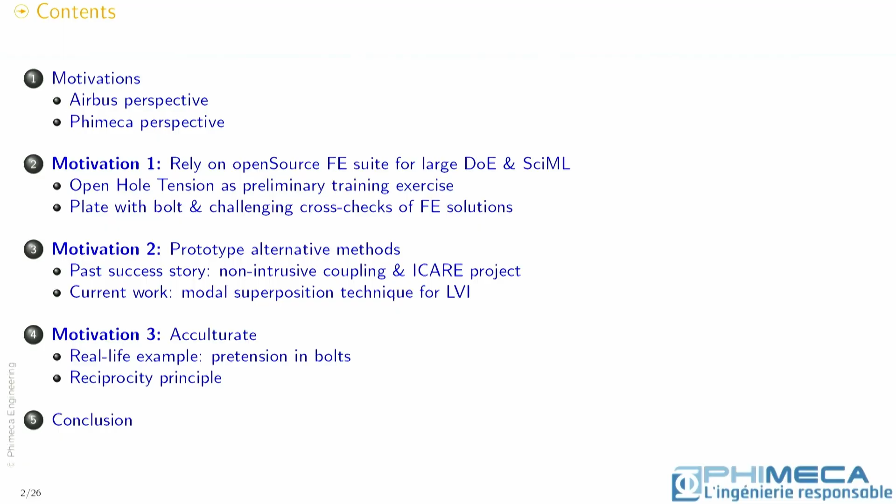Karina will concentrate on 2 use cases we defined to anticipate this change from commercial software to Code_Aster. The second motivation is about a huge opportunity to prototype alternative methods, to test something else than we do usually on commercial software. I'll evoke 2 use cases, 2 different examples: one extracted from the past, a project called ICARE, where we joined together with EDF, and one other out of my current work, preparing additional use cases. But first, I'll let Karina develop further the 2 first sets of use cases we are addressing today.

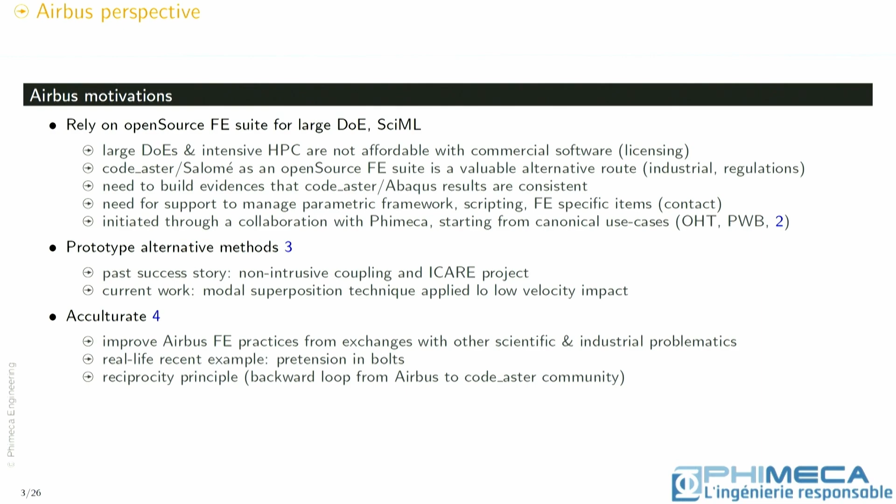You have told about this kind of motivation. So for Phimeca, there are several motivations. The first one is about exploring new methods in machine learning applied to structural calculation using finite element. Those kinds of methods use mesh morphing methods. And we are also interested in using Code_Aster for innovative solutions.

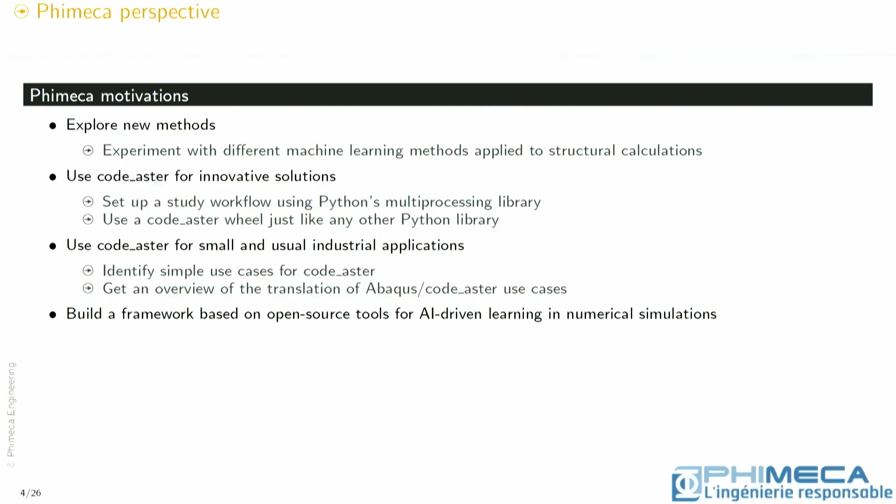So we have set up a study workflow in Python, only in Python, using the multiprocessing library. And we also built a wheel that will help us stay in a Python environment. We are also interested in how industrial customers could use Code_Aster, how Code_Aster provides solutions in their applications.

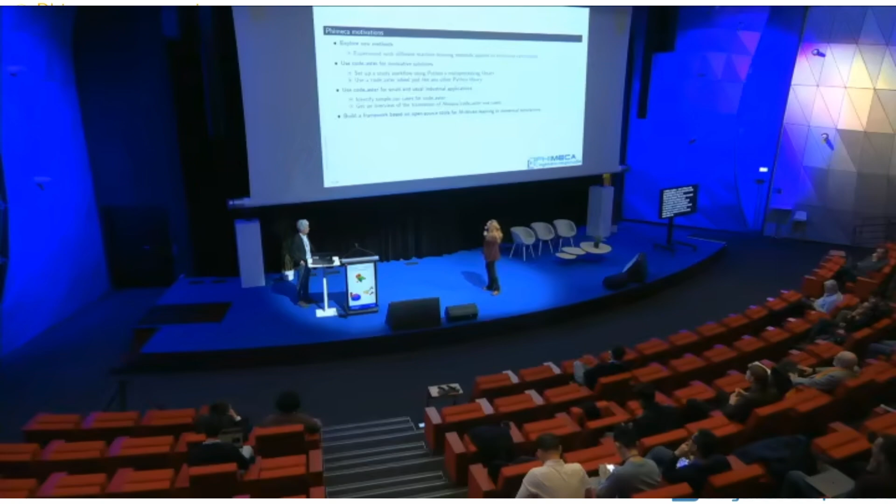So with Airbus, we identified some simple cases, and here we present only 2 cases, but further we will have other cases to be treated. In the second case, we see how we can compare Abaqus and Code_Aster, and what kind of translation could be done between them. We are also interested in building a framework with open source tools for AI-driven learning in numerical simulation.

We start with the first example. It's a very simple case, because everyone has tested this kind of structure. It's a plate with a hole, and only a quarter is modelized. We consider the 4 parameters that characterize the plate, which are the height H, the width L, the radius of the hole in the plate A, and the thickness of the plate T.

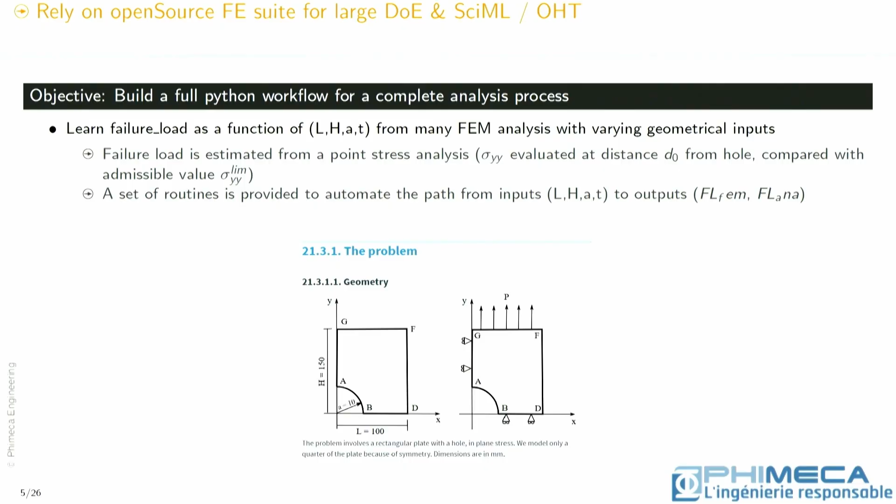So we look at the failure load estimated at distance D0 from B. There is an analytical solution also. This was a case to build a workflow fully in a Python environment. As usual, there is the geometry, the mesh, and the calculation with Code_Aster. And for the first time, we treat the field results from the calculation with machine learning methods, which are the stress field and the displacement field. So that was the case, very simple, and it works, and the results are satisfactory.

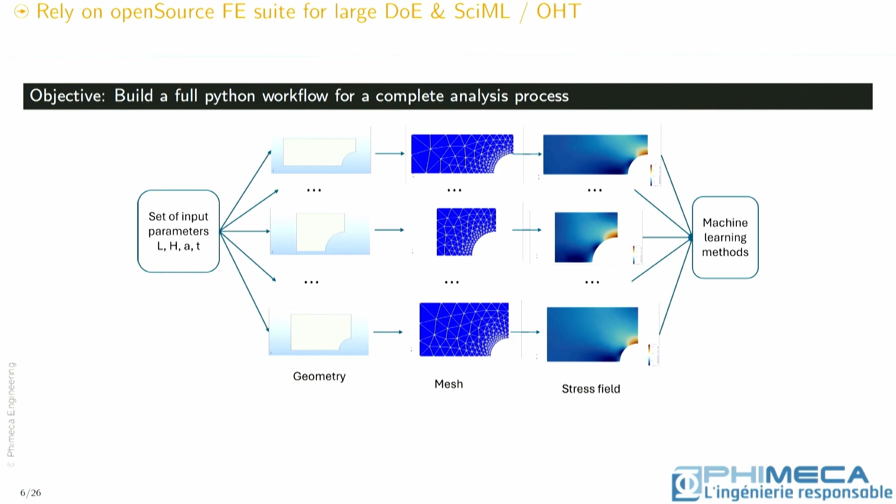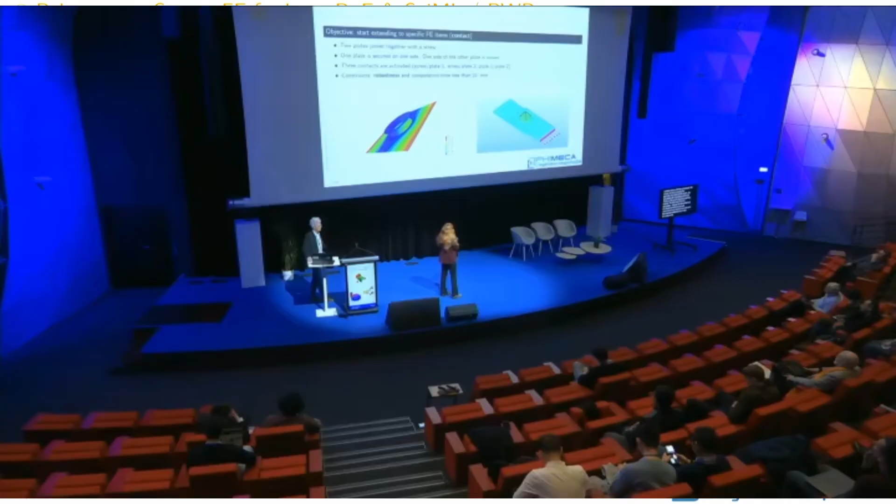So we go for a case that is more complex, which is two plates joined by a screw. One of the plates is clamped, and the other is pulled, and there is also a beam to stabilize the calculation. There is contact, three types of contact with thickness between them. There is good result interpretation, but we have constraints: we have to change geometry, change the mesh, change the different parameters of the modelization, and this calculation must be robust even if you change everything. So we did not succeed in getting a very good result with this kind of simulation, even if the interpretation was good. There is a lot of convergence problems in our cases.

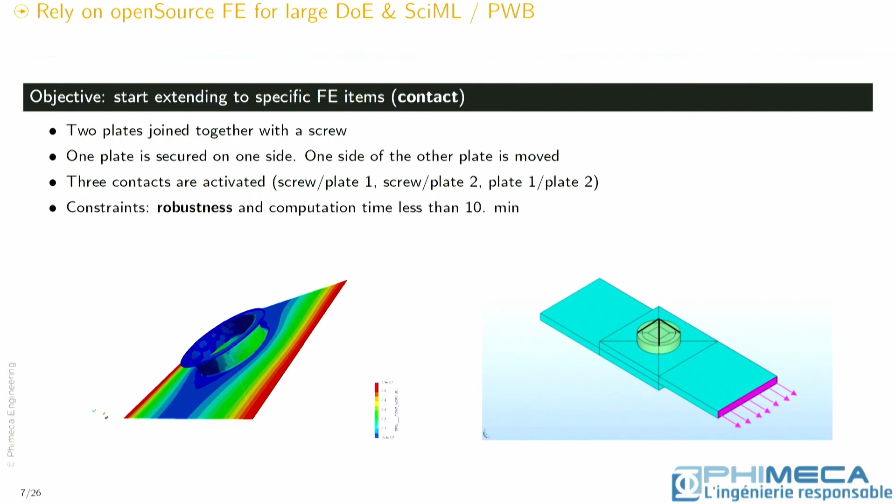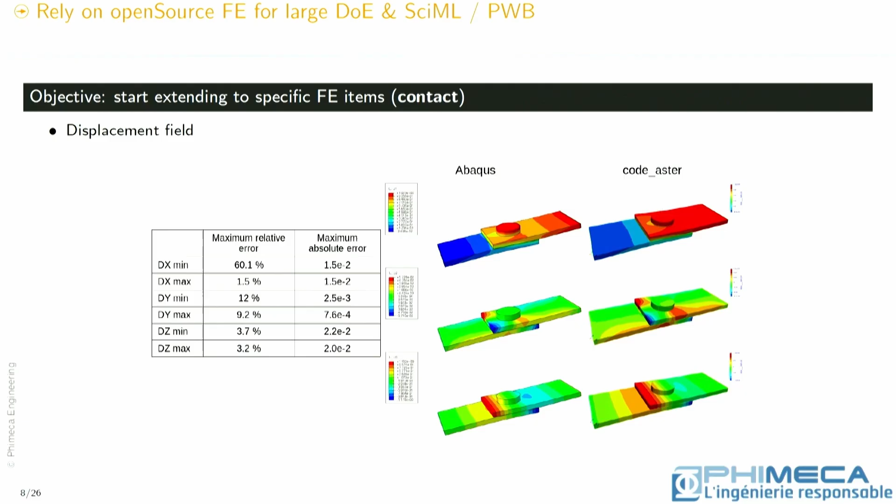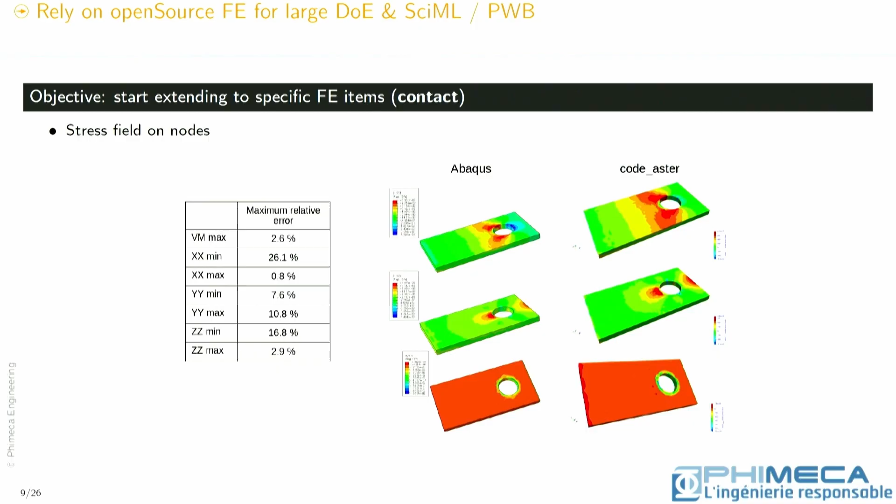So I could show you some results where we compare Abaqus with Code_Aster, but we have changed a lot of parameters, and this is not possible when we want to perform a large number of simulations, changing a lot of things. So the results are not very satisfactory. We have looked at the displacement and the stress field on different pieces, but the result is not good enough to go further.

The next set of motivation is about prototyping alternative methods. Here I will cite an example taken from the past, the project ICARE, 2013-2017, which emerged from preliminary work led at LMT by Allix and Gendre. The idea was to couple non-intrusively, meaning with no refurbishment of the global mesh, a global representation of the whole structure and a local representation of the local detail to be investigated.

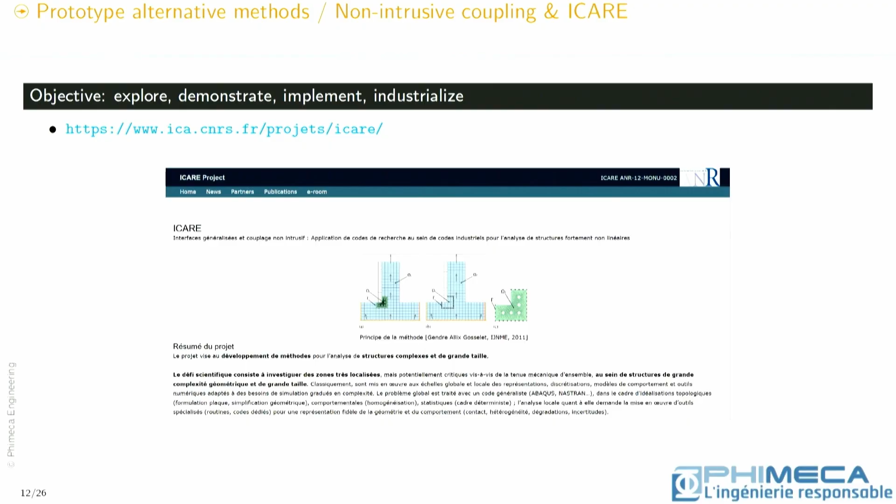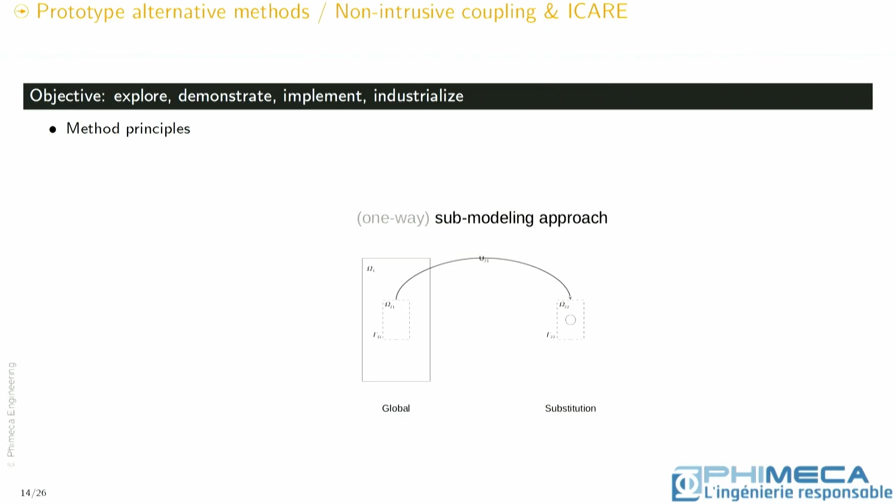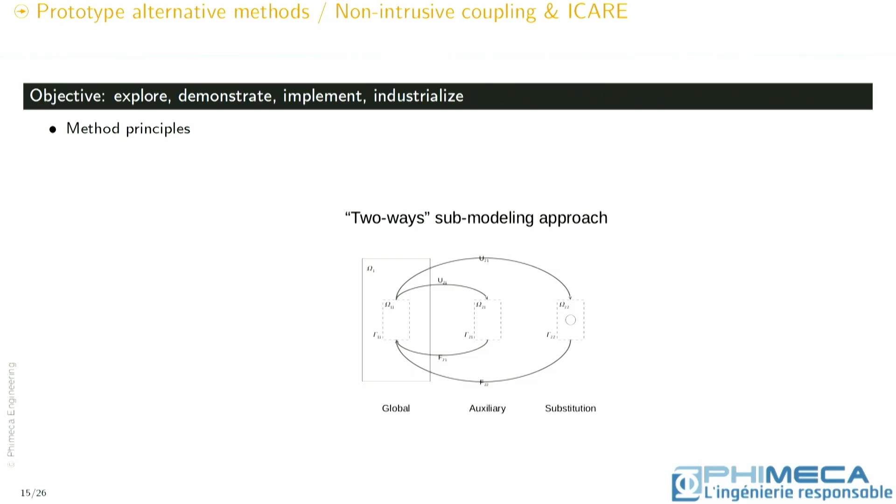To do that, we explored an alternative to the traditional sub-modeling approach with just displacement extracted from the global and injected into the local. We implemented a two-way sub-modeling technique, which is iterative and which re-injects from the local to the global the reaction forces extracted at the border of the local model. So this was the primary idea. And the interesting fact is that the initial work started with Abaqus, but highlighted that this was not a convenient environment to go further.

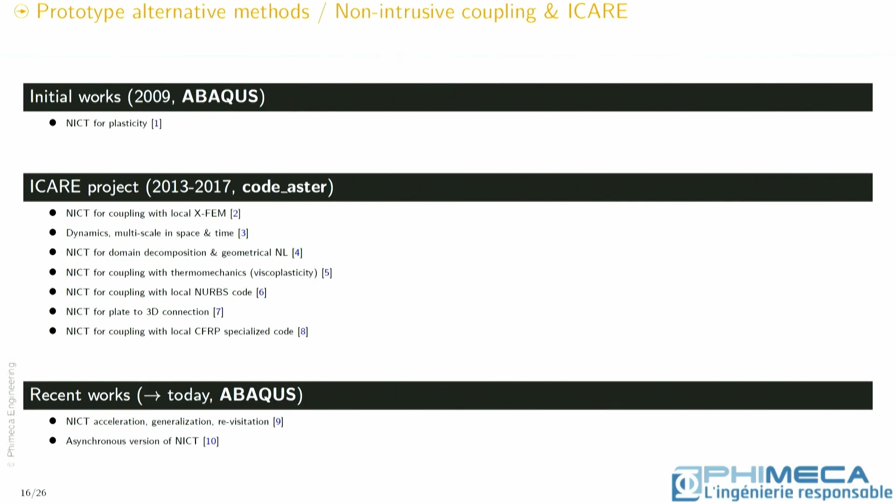Then, within the ICARE project, we shifted to Code_Aster to get this freedom of development. We explored many different topics: coupling a local X-FEM code with a standard global code, coupling dynamics with a standard static code, coupling for domain decomposition needs, and so on. We developed a lot within Code_Aster, and by the end of ICARE, we were in a position to propose a first, very preliminary prototype to the Simulia guys, the Abaqus development team. Years after, through the co-simulation engine around Abaqus, we have the possibility to really make those initial ideas alive in an industrial environment. It dates from 2013 to 2017.

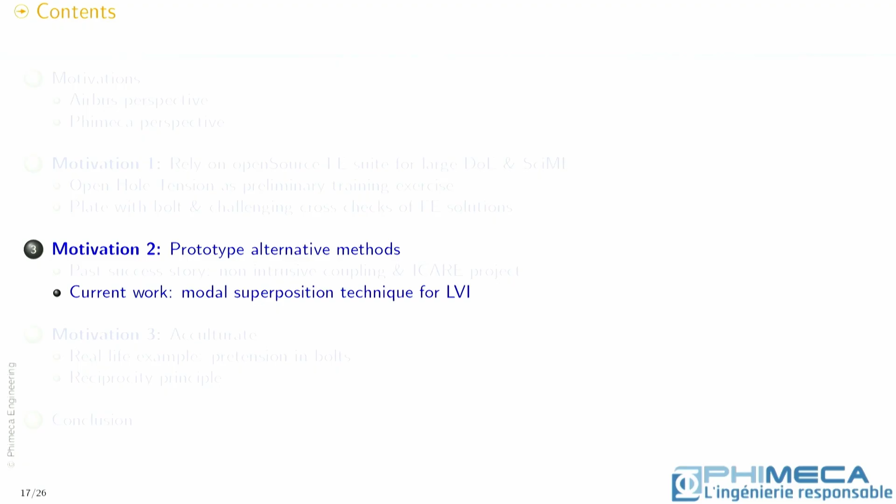The other example is extracted from a much more recent activity, preparing the next use case to be shared with Karina. It's about low velocity impacts, another critical use case for our applications: damage tolerance against shock, low velocity shocks of fuselage panels. It looks like an aeronautical structure.

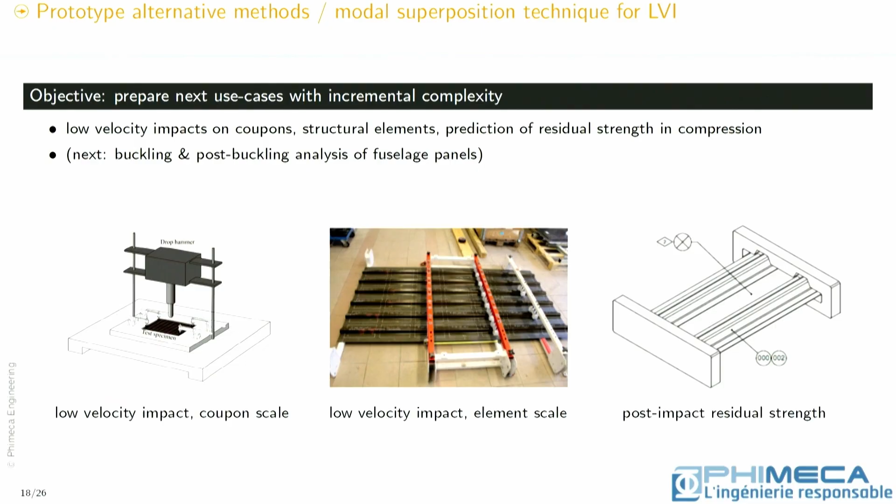Here it's low velocity impact, meaning it's not rapid dynamics, but it is dynamics. So when trying to apply, usually we use explicit computation to deal with it, which is too expensive within the framework we want to develop. So we turn to alternative methods like modal superposition.

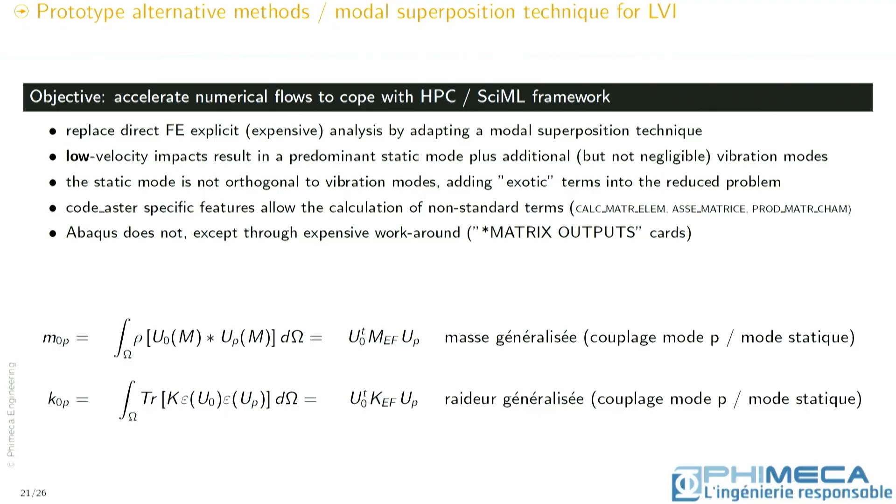And those terms, you can't compute with a commercial software. Here you need to rely on available features within Code_Aster, which are mentioned here, and which allow you to compute those terms and, in the end, to solve the problem. There would be ways through Abaqus, but a very expensive workaround—you'd have to write the complete assembled matrices to the file system, reread them, and reinject them in the solving.

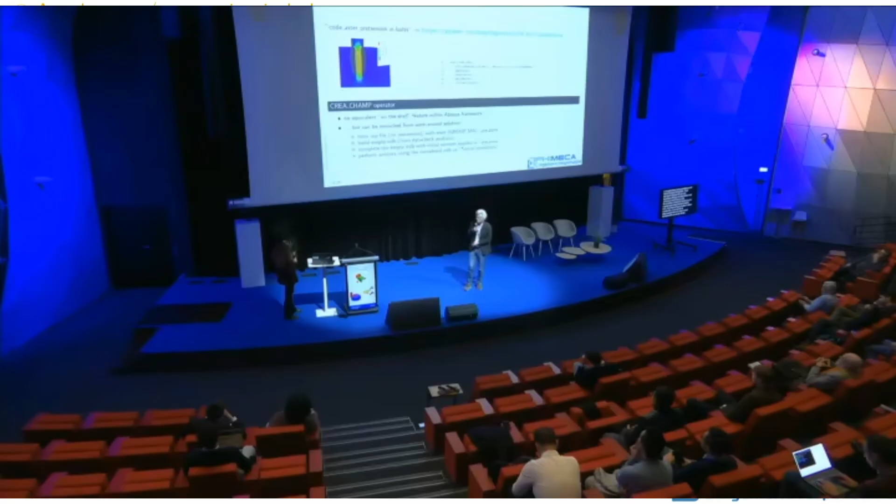The third and last motivation is about acculturation. It sounds a buzzword, but it's for real. I took a small example which is real life. During my activity with Phimeca, we had to decide something about the way to introduce the pretension in the bolt, which is critical to capture the true behavior of the bolt.

Knowing nothing from scratch with Code_Aster and pretension, I went on my preferred web explorer. I typed Code_Aster plus bolt plus pretension, and I got this GitHub emanating from an Italian company, reminding the different ways to model pretension, which are about using expansion coefficients in a thermal approach, or cutting the bolt into two different parts and applying a pretension.

And there was a much more seducing method relying on CREA_CHAMP in Code_Aster, just introducing the initial stress as initial conditions, which was not standard in Abaqus. So we had to develop something specific to mimic the same in Abaqus, but in the end we could manage.

So yes, this is really for me acculturation, and the benefit we have when turning to Code_Aster and the associated community is to discuss with guys who deal with completely different environments, industries, interests. It's really important.

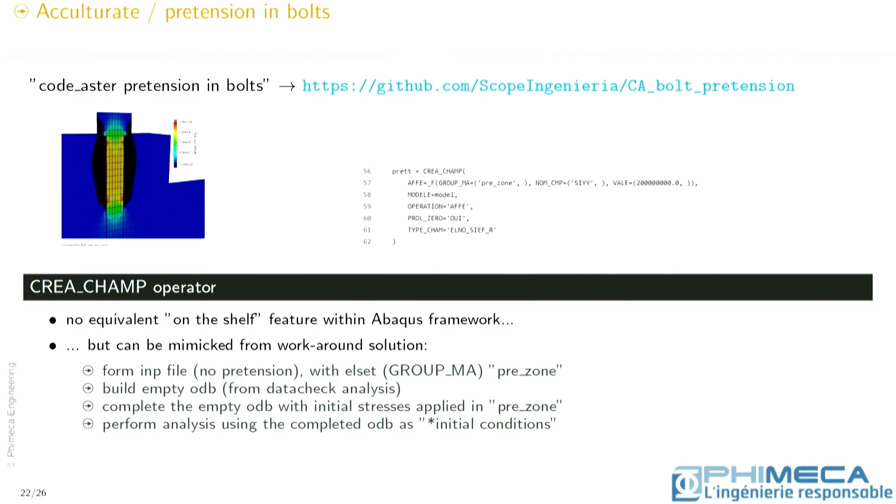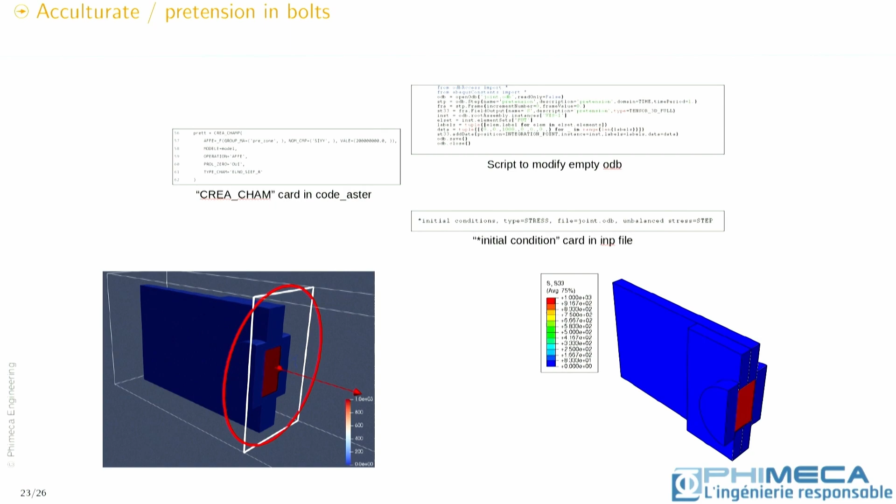The expected result of the pretension introduction, and the different ways through CREA_CHAMP in Code_Aster and through an ad hoc method in Abaqus. Behind the fact we rely on open source, there is a reciprocity duty.

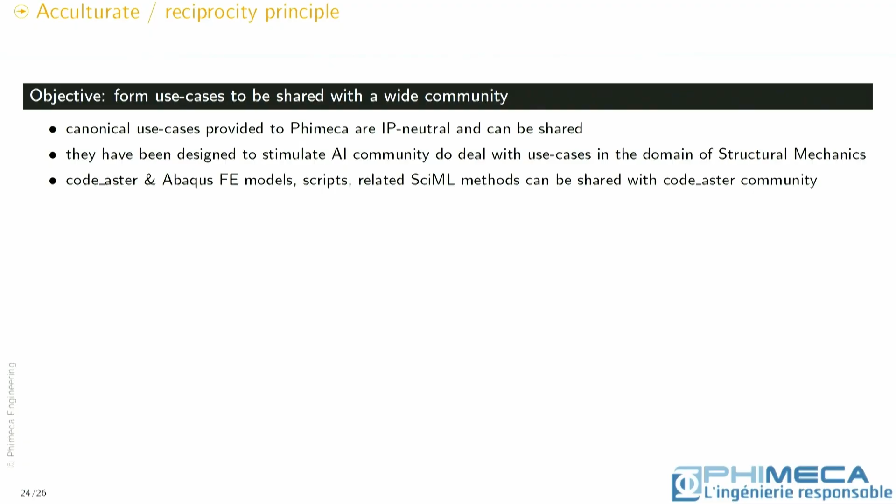Which is the principle: if you increase your knowledge from contacts with the community, you're supposed to give something back. And here it's an opportunity also, because all the use cases we are developing jointly with Phimeca are made IP neutral from scratch, and they can be shared. So the FE models, probably the pipelines for Code_Aster and for Abaqus, all these items can be shared for sure.

Now I've managed to convince my manager at team level, so it's just the smallest operational unit, but it's a team of 12 guys likely to use Code_Aster in the future. As mentioned in the beginning, I'm a member of IRT Saint-Exupéry also, so I'm doing the same process at IRT, trying to convince my colleagues, and it works. I know there were preliminary contacts a few weeks ago.

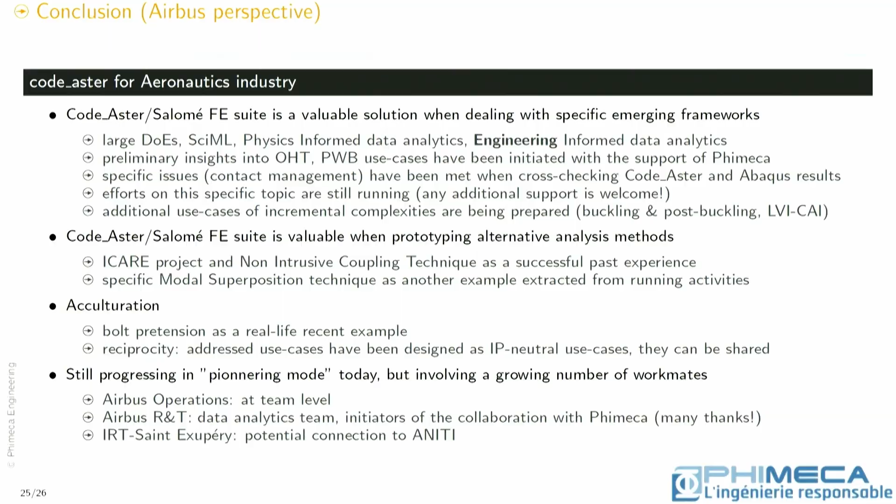And the last point: I would really like to thank Phimeca, and especially Karina, for investing such a lot of activity on solving this problem. We couldn't fully solve it, but it's still in progress. Also my colleagues from Airbus R&T, central R&T, colleagues from the data analytics team, Sophia Haddad, for initiating these works and establishing connection with Phimeca.

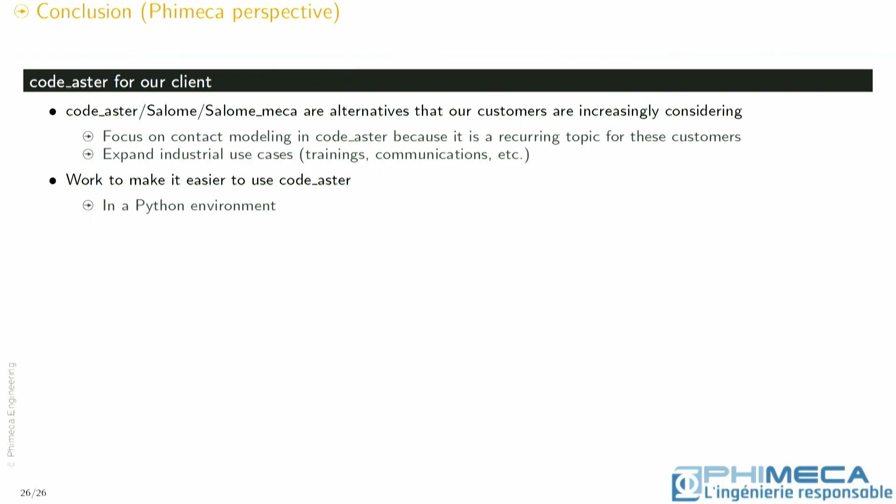Is there any feature missing in Code_Aster for your application? For example, maybe for composite simulation, is there any feature that is missing in Code_Aster?

I'm back after a long time away from Code_Aster, but I know during my time in ANR ICARE I developed things for composites. So yes, there are things to be re-evaluated, but definitely it's a track of interest for us, and we will re-explore the capabilities of Code_Aster in this domain. I think the definition of a local coordinate system can be very useful for material orientation or load application.